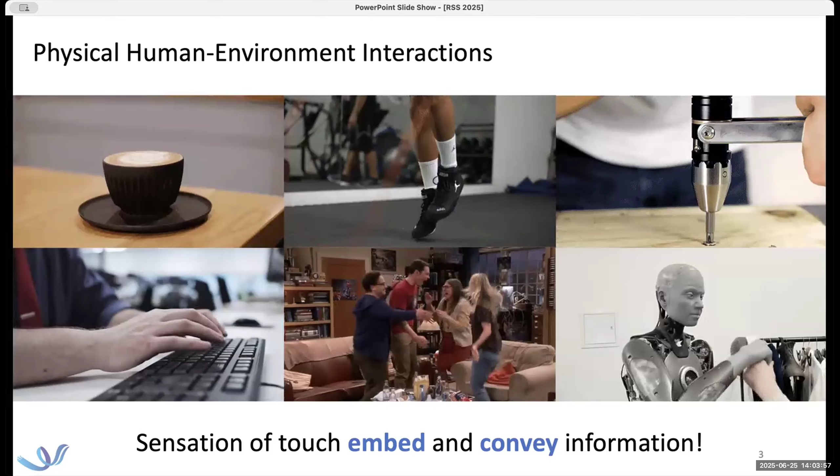And such sensation embeds tons of information. As an example, at this moment, as you are sitting on a chair, the tactile sensory systems throughout your body are constantly capturing tactile information, feeding it to your brain, which processes the data and generates signals to drive the corresponding muscles. Therefore, you will be able to adjust your body posture and balance while sitting on the chair.

On the touch side, we are very excited about building intelligent interfaces that will be able to enhance such sensation of touch by recording, modeling, and augmenting through tactile sensors, AI agents, and haptics.

But we are facing this challenge of touch sensation throughout our human body. They also serve us 24 hours a day. So the research question comes in: how to efficiently scale up the tactile sensing interface in terms of coverage area, and how to seamlessly integrate such tactile sensing interface in a flexible, breathable, and very thin form factor.

And the same challenges also appear on robots, not only on humans, as we are going from dexterous hands to robot dogs to even larger scale systems like humanoid robots. Ideally, we should have full coverage area on the robotic system in the same flexible form factor on the surfaces.

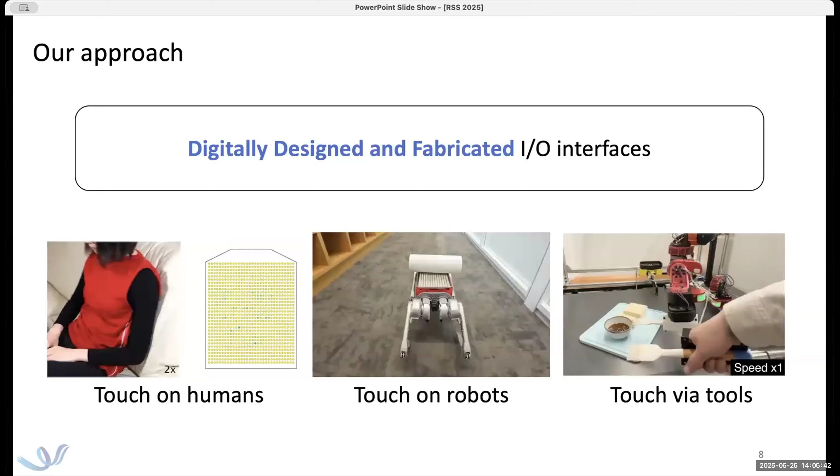And to start with, let's talk about capturing and modeling touch sensation on humans. This was my work back in 2021, where we presented a full-size tactile sensing garment in the form factor of a vest, socks, and glove.

Each individual pixel here captures continuous pressure distributions. The sensing functionality comes from the customized piezo-resistive fiber, where we coat conductive stainless steel thread with piezo-resistive nanocomposites. When we overlay two fibers orthogonally with each other, they form a sensor at the intersection, where a piezo-resistive layer is sandwiched by two conductive electrodes. When you press it, the resistance will drop, converting pressure information into an electrical signal.

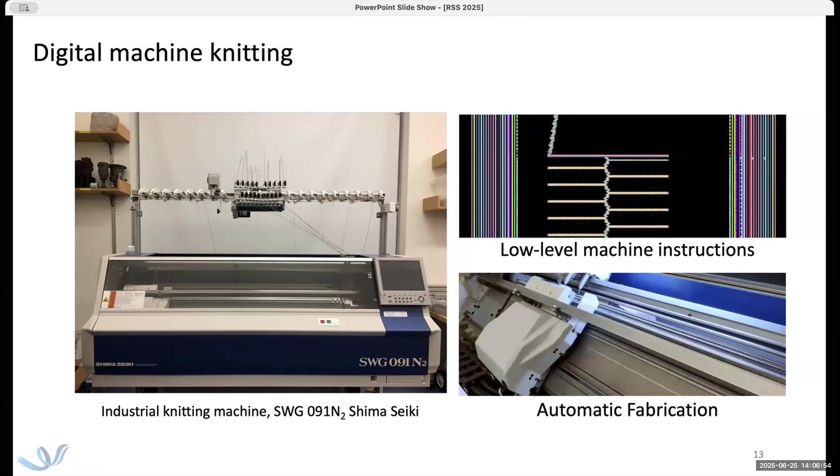By leveraging such fibers, we are able to apply digital machine knitting, an industrial-scale textile manufacturing technique, enabling users to computationally design and automatically fabricate textiles with complex shaping, textures, and colorwork in a stretchable and breathable form factor.

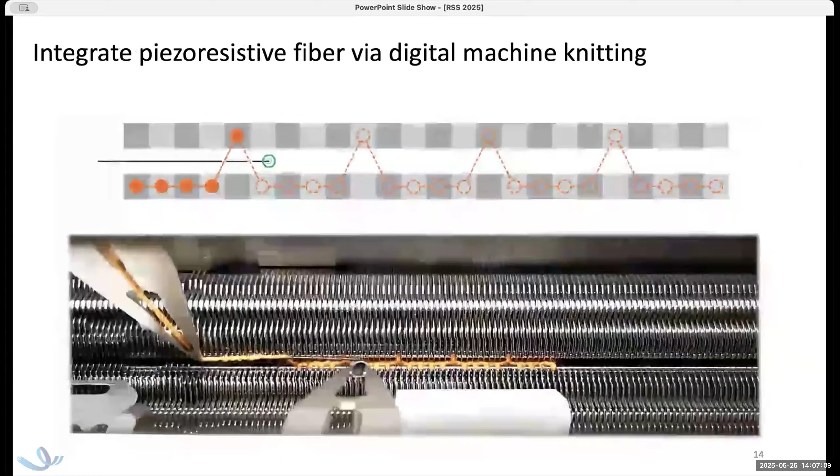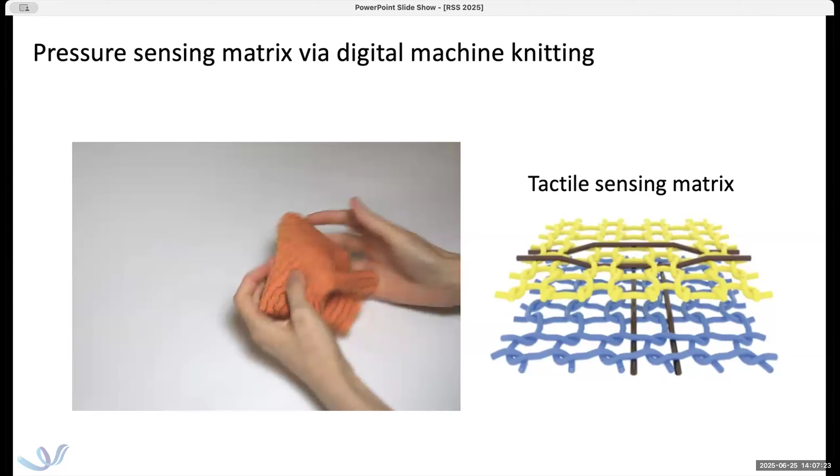Here's an example of how we are automatically integrating functional fibers into textiles using the machine. It will be able to form fabrics that are soft, flexible, and stretchable, just like our regular garments, and allow us to fabricate a scalable tactile sensing matrix with thousands of sensors.

With that, we are able to capture diverse physical human-environment interactions in a continuous and real-time manner. This includes doing different kinds of exercises with the tactile sensing socks, and different kinds of human-object interactions with the glove, and so on.

We are also able to apply machine learning techniques to extract features and insights from such high-dimensional data. Here's an example: we are using a convolutional neural network to regress the full body pose by only looking at the tactile sensation from a pair of socks.

As another example, we are able to project the tactile sequences captured from a human's back during different kinds of sitting postures on furniture into a 2D space, achieving a classification accuracy of up to 94%.

Beyond capturing physical human interactions using wearables, we also present the same kind of functions using an environmentally integrated tactile sensing interface in a carpet form factor. This carpet spans 36 square feet with more than 9,000 sensors, and it's able to capture the interactions with whoever is walking on it, working for multiple users, not just a single user wearing garments like in the previous examples.

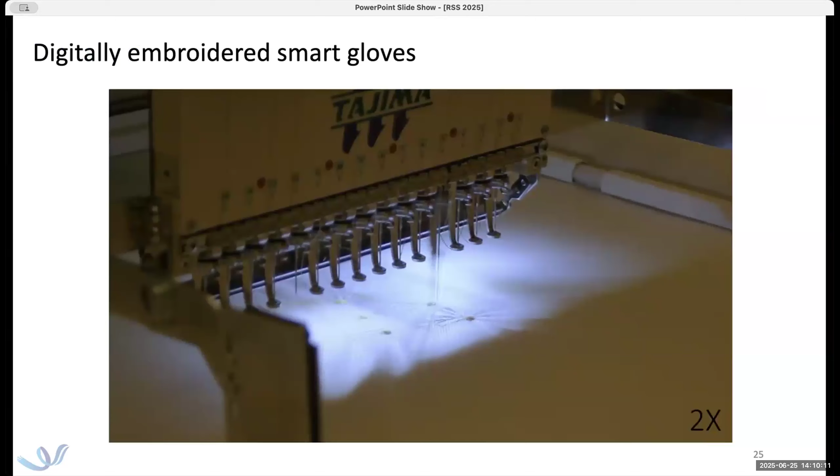Beyond sensing, we also work a bit on haptics. Here is a digitally embroidered smart glove with tactile sensors at the fingertips and vibrotactile haptics on the inside. The whole glove is manufactured by digital embroidery, an automatic manufacturing process that allows us to customize the glove with arbitrary sizes and different layouts in a relatively accessible manner. By leveraging a system with both input and output modality, we are able to transfer tactile sensation.

Here's an example of transferring sensation between users. In a piano learning scenario, we can transfer the sensation of touch from the teacher to the student, promoting learning performance and efficiency.

A similar setup is applied in teleoperation, where we equip a parallel gripper with tactile sensors and transfer the sensation to the human via vibrotactile haptics on their hands, allowing them to manipulate soft and deformable objects in a more robust manner.

With this, I'd like to switch to equipping robots with human-like tactile sensing capabilities. This is the same work as the first piece I presented, where we use a digitally machine-knitted sleeve to conformally cover a KUKA arm with large curvature at the joint, equipping 700 sensors evenly distributed over the arm to capture human-robot interaction.

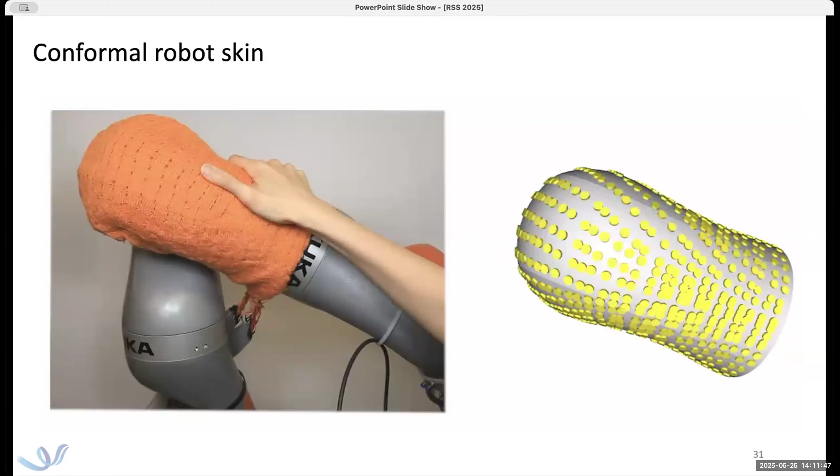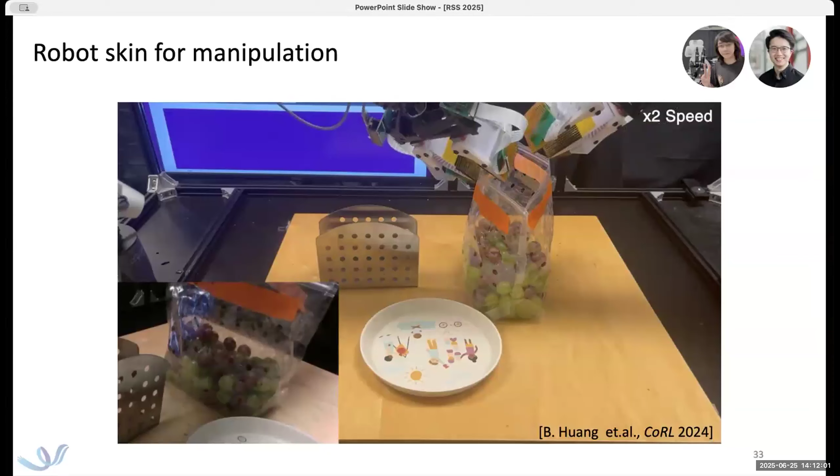A similar setup can be applied to specialized grippers for different kinds of contact-rich manipulation, such as egg picking, water bottle manipulation, and scissors manipulation. Here's a more recent example using a bimanual gripper with tactile sensors integrated for delicate manipulation.

As many speakers mentioned earlier, when doing in-hand manipulation, the gripper itself occludes the vision information, so tactile information inside the hand is very critical for this kind of task.

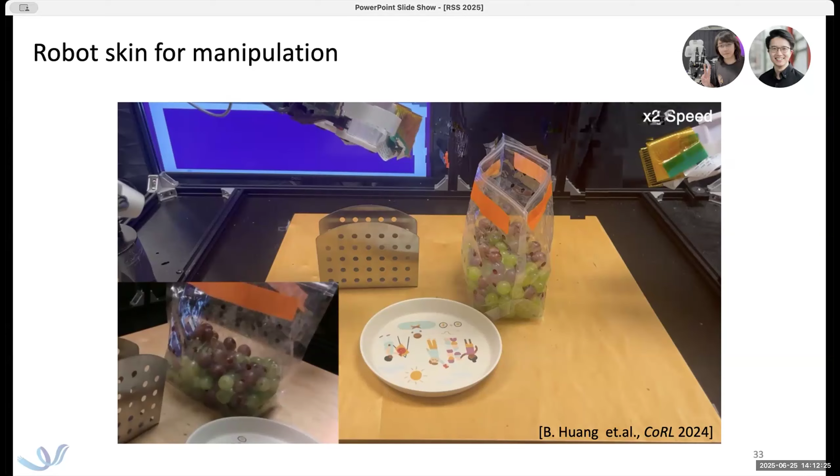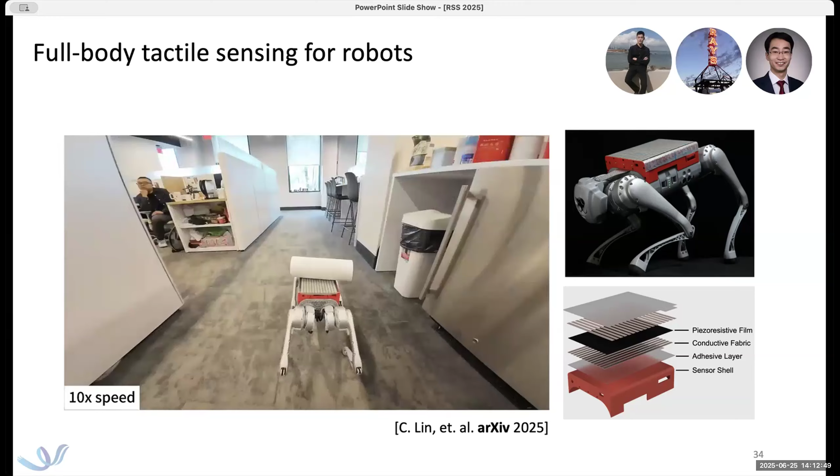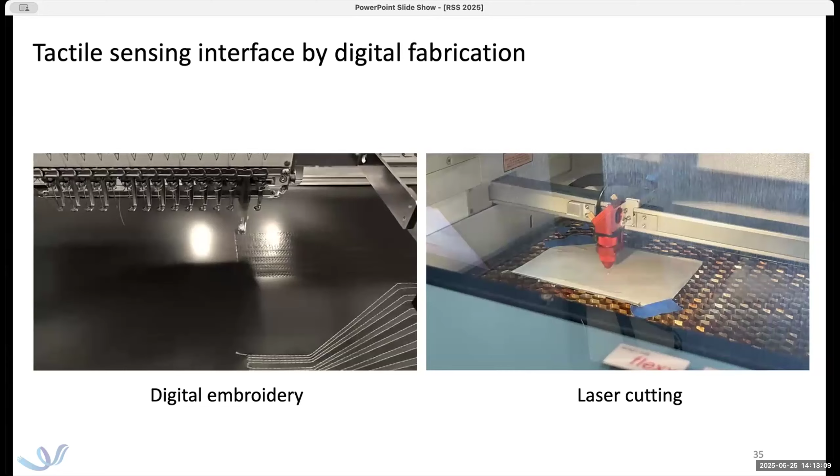All of these tactile sensors are enabled by a digital fabrication process including embroidery and laser cutting, which is automatic, making it easy to scale up with minimal manual labor, and we can also automatically adjust it to arbitrary shapes and designs.

By integrating the tactile frames into the learning policy, we're able to have the robot dog carry a diverse set of objects in a robust manner.

When talking about robots, we're always talking about potential superhuman capabilities. All of the touch capability I've discussed so far is actually very similar to humans, so we also work on superhuman capability using electrical impedance sensing.

Here is a gripper equipped with an array of electrodes. Electrical impedance sensing works using pairs of electrodes: one pair injects current, and another pair receives current. By comparing the difference between the input and output signal, we can infer the impedance profile across these electrodes.

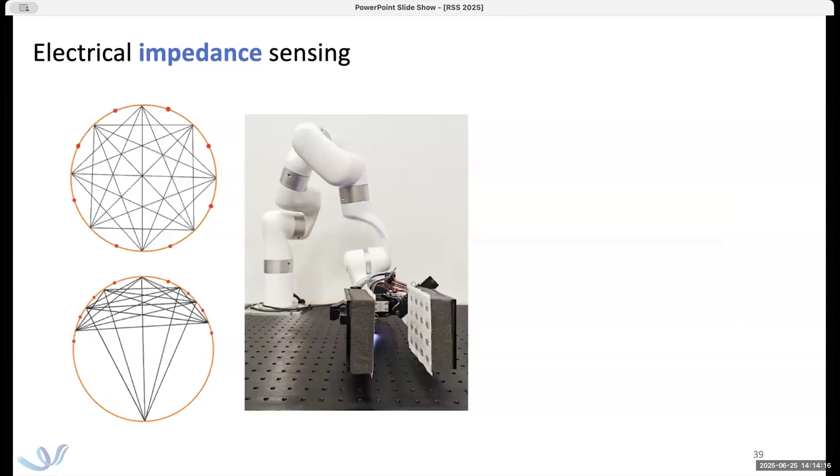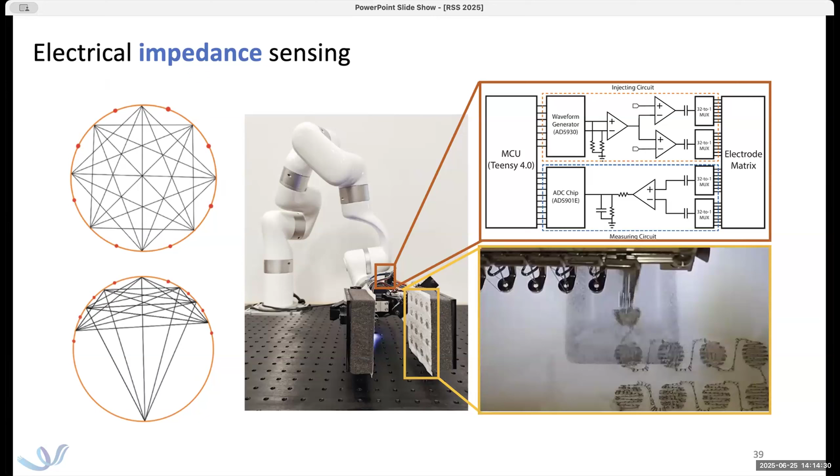We have a digitally embroidered electrode array, and with a microcontroller that can achieve such an active sensing mechanism, we can equip this parallel gripper with active electrical impedance sensing.

By grasping an opaque container and pouring different liquids into it, we're able to capture dramatically different impedance profiles for different liquids in the opaque container, and therefore classify what kind of liquid is inside.

Also, during manipulation, as we rotate the container, the water profile changes, which changes the impedance path in the container as well, allowing us to regress the liquid state inside of it.

And with that, I would also like to talk about the third part of the talk, which is about equipping, sensorizing tools instead of sensorizing humans or the robots.

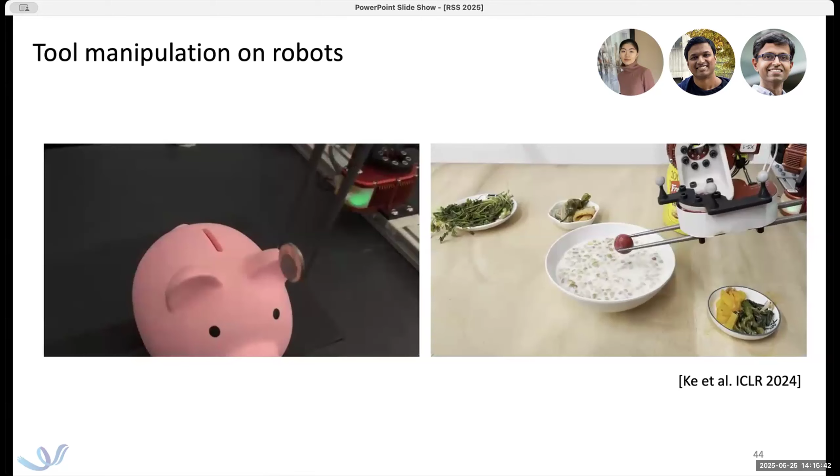Tool using is actually a hallmark of intelligence. It's one of the main things that makes a human a human. So when we are trying to infuse this kind of intelligence to robots, researchers have been exploring how to let robots manipulate tools for very delicate tasks. Here's how a robot manipulates a chopstick, which is interesting because I've been using chopsticks for over 20 years and I'm still not good at it. So this is a very delicate and complex task for robots.

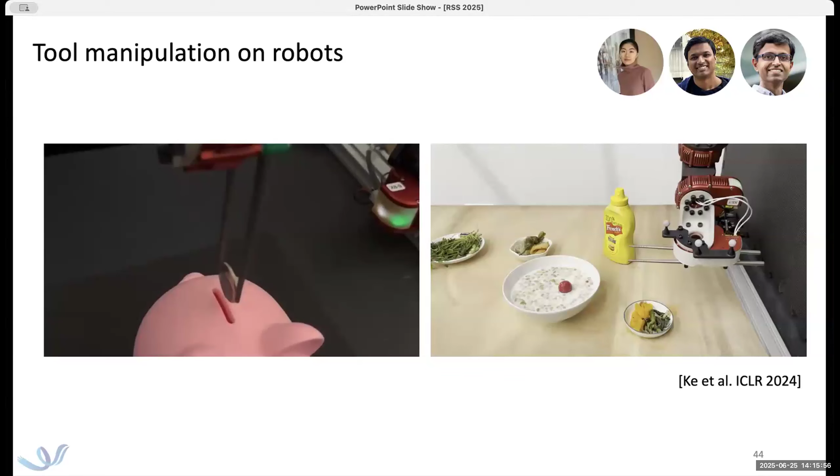Humans use a diverse set of tools every day. Imagine when you're cooking in the kitchen, you would grab a knife to cut, grab tongs to distribute the food, and use a spatula to stir fry the food. You do it in a long sequence manner in a very natural way. So when we are trying to infuse such intelligence to robots, we want to make sure that on the human side, we are also manipulating the tools in a very natural manner.

Therefore, we are proposing to sensorize the tool instead of sensorizing humans' hands, because what we observe is that when humans wear gloves doing different kinds of activities, the glove actually changes their behavior dramatically. So the data we are recording is not the most natural way of us interacting with different objects.

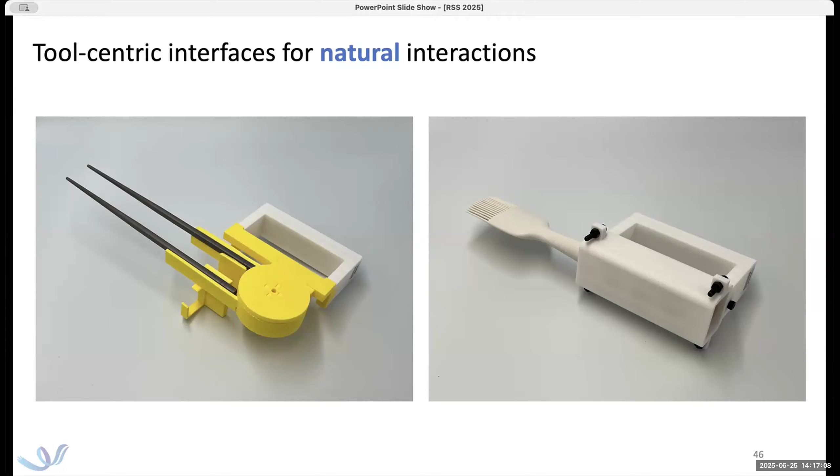So here's an example where we are mounting modularized sensors on different sets of tools. It comes with a SLAM camera for pose estimation of the tool, as well as a torque sensor at the handle. As a user, you come into the kitchen and grasp the tool, and then you can perform the task very naturally, just like what you do with a regular knife.

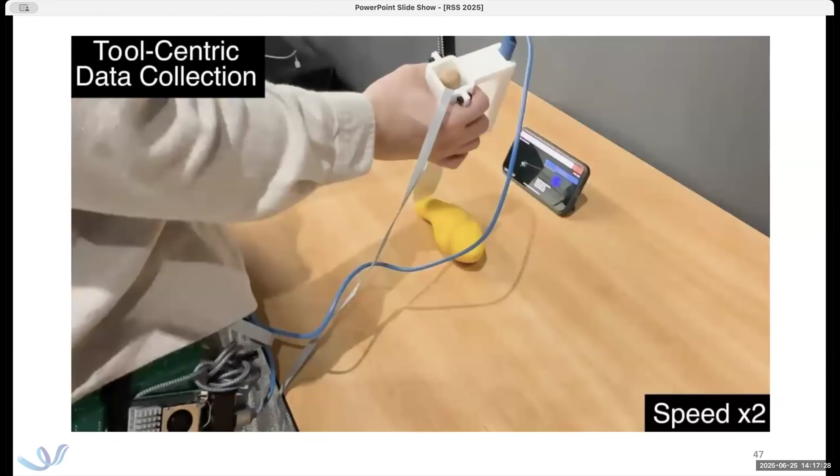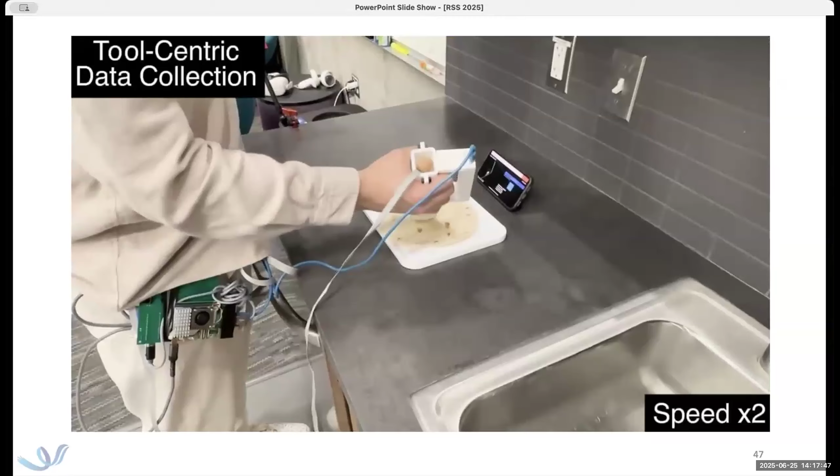I really like this knife example, but I cannot bring it because of safety issues. But I brought the chopsticks and the brush with me, which are behind the room. So on the knife, we not only have a torque sensor, we also have a sensor at the end effector of the knife. Therefore, when we are manipulating the knife and trying to make this action, it will be able to capture the interaction between the knife and the food as well, capturing data from that perspective.

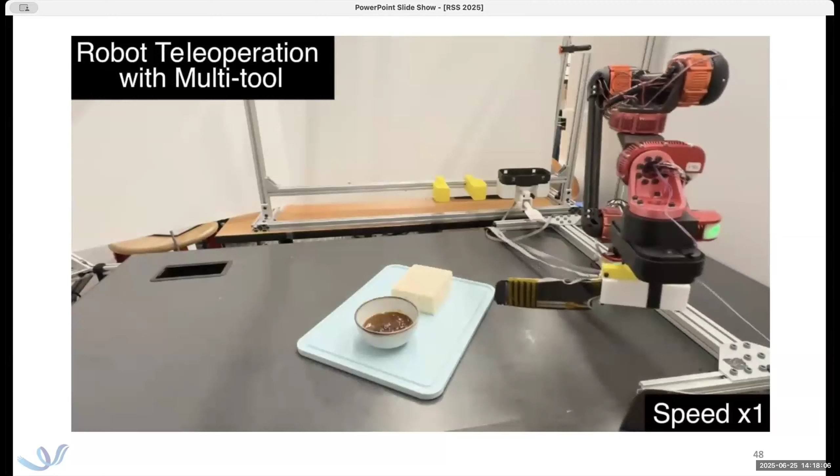So this is a very natural way of capturing data on how humans use different kinds of tools. And we can also use the same setup on robots as well. Here is a teleoperation setup where the users naturally grasp the tool and perform the task. Then we have a twin on the robot side, which is mounted with the tool in a robust manner and maps the action to do the task.

Notice that this user is cutting something, and then he goes to the background and changes from the knife to a brush. At the same time, the robot is also changing the tool from the knife to a brush in order to map the same action. We also built this robust tool-changing setup, which allows the robot to grasp the object very securely and then perform the action with relatively straightforward control.

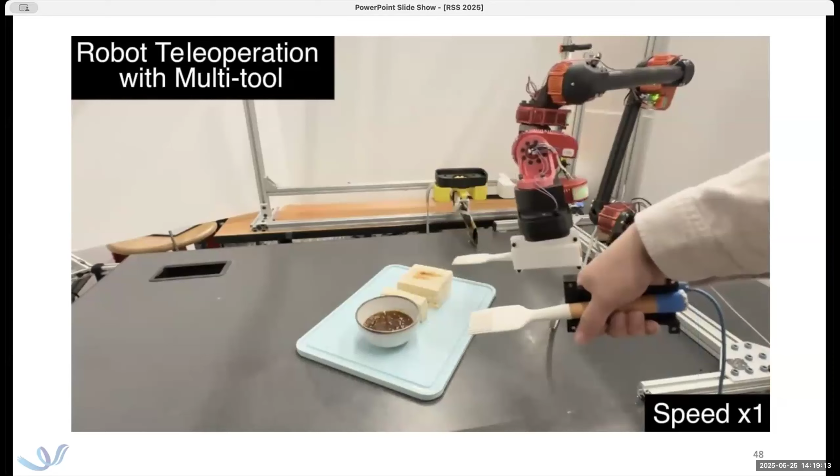These are just some examples of the tools that we are sensorizing. The modular sensor is a relatively generalizable way that will be able to plug into different tools with a handle or with an articulated mechanism like chopsticks or scissors and so on.

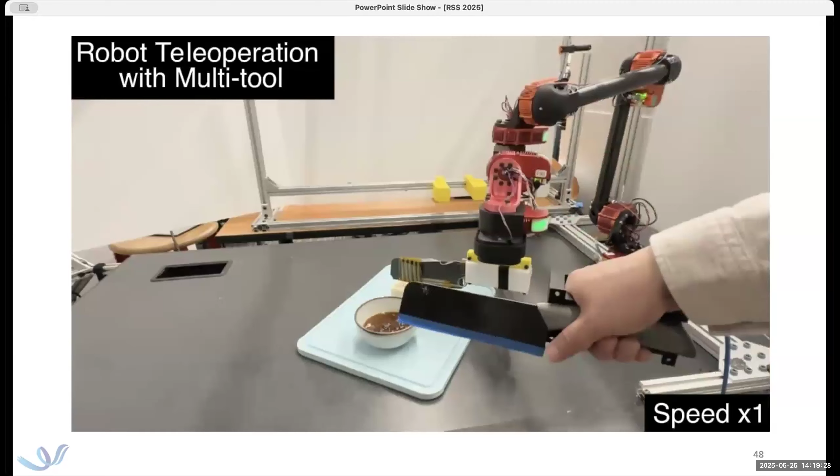And with that, I briefly talked about some of our work having tactile sensors on humans, robots, and tools.

I would like to highlight that I do see touch as a very useful and skyrocketing sensing modality beyond vision, audio, and text. A lot of people have mentioned that these digital modalities have benefited a lot from having extensive data. To me, I feel like the extensive data benefits a lot from off-the-shelf sensing and output interfaces. Imagine you can buy a camera or a speaker at a relatively low cost, and implement it in your setup very quickly.

But that is not true for tactile sensing right now. So I would love to help democratize the tactile sensing system for different communities. These are some of the work in the human-computer interaction community, where we are building a design toolkit that allows users to input arbitrary 3D geometry, not limited to a human but also different kinds of robot systems. Users will be able to interactively edit their tactile sensor designs, potentially with some hints from AI agents to help them with the design.

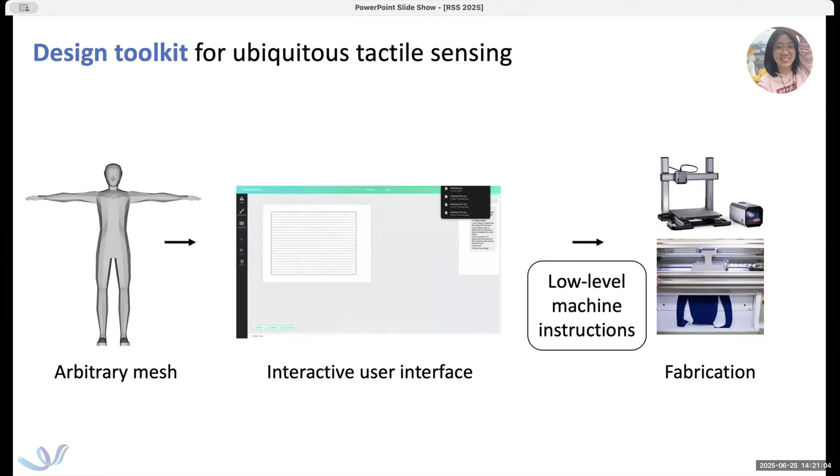And then it will generate low-level fabrication instructions for immediate fabrication, either through laser cutting or some other more specialized digital fabrication mechanisms. We're also working on the firmware, where we'll be able to have an adaptive circuit and firmware for efficient and adaptive data acquisition in a wireless way. And we are also open sourcing a lot of our designs, circuit, and control for broader usage, so feel free to check it out. And with that, thanks for having me here, and I'm open to questions.

Yes, but they did very good work. Speaking of tools, it seems like when you're working with tools, you have this interface to have the user hold something which stabilizes the tool. What happens, like, have you thought about humanoids, for example - they use off-the-shelf hands, and they might not necessarily have those extra interfaces to help hold the tool.

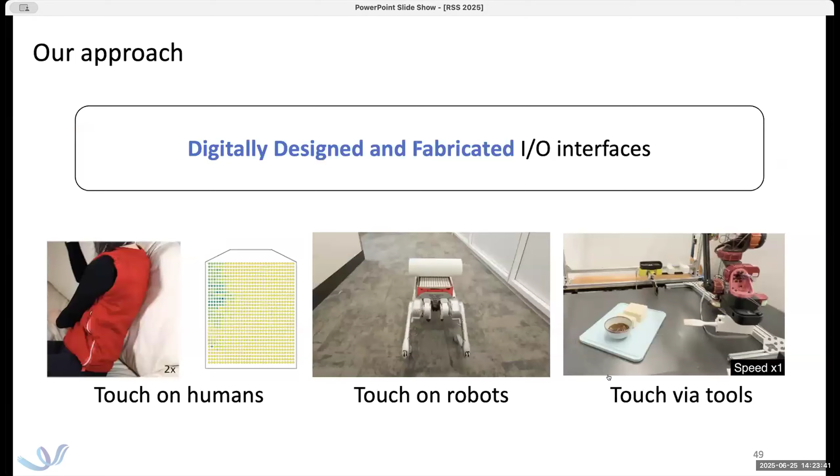So do you think that some of your work would also apply to humanoids with dexterous hands that could flexibly handle different tools without tool-specific interfaces? Yeah, so I think this is a completely different approach to me. If it's a humanoid hand, it might be able to grasp the tool just like how humans do. But what we've tried, the reason why we developed this tool-changing thing is we find the hand is very complicated to control, and when it's grasping the tool, it's a little bit not robust. So in order to quickly bridge the gap between how humans use tools and how robotic systems use tools now, we are actually trying to make this more robust tool station now. I think there are two very different approaches, and we're not sure which one is better at this point, but I think both are worth exploring.

Thank you for the excellent talk. So talking about different approaches, in my group we've worked a little bit on some sensors, but I often get overwhelmed with the number of different types of sensors people are developing in different modalities. Do you think that there's, in your view, one sensor that is going to be best for most scenarios, or is it really going to have to be task specific? That's a really hard question.

At this point, I feel like it needs to be task specific. I guess it's just because people are still exploring and they don't know what kind of data is the best and what kind of information is the most important for a generalizable robotic system. So I think once they figure that out, it will be more clear what kind of sensor is best for general usage.

At this point, I see different kinds of sensors have different advantages. For example, for the piezo-resistive one, the biggest advantage is it's very thin and can easily scale up to a very large coverage area. So it's possible to cover a whole humanoid robot, the full arm, with a relatively low spatial resolution - not as high as GelSight and visual tactile sensors. But it will be able to achieve capability very similar to humans, which is low resolution but they do have some kind of sensing on their body.